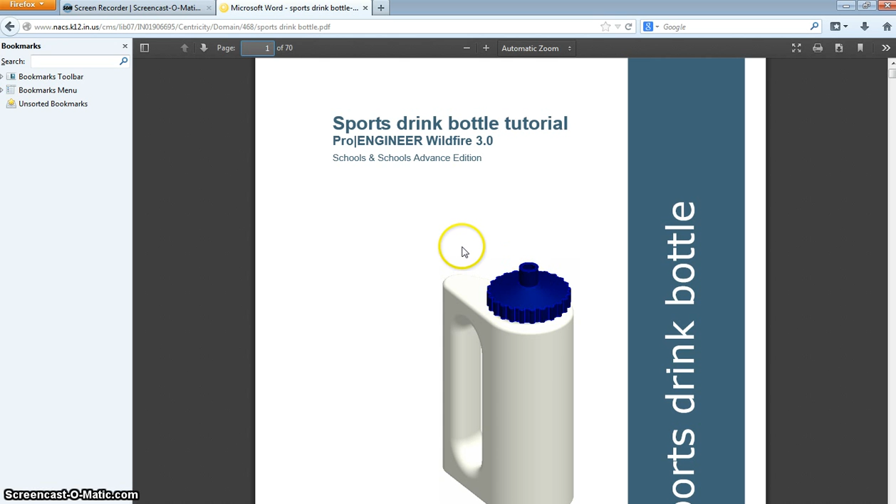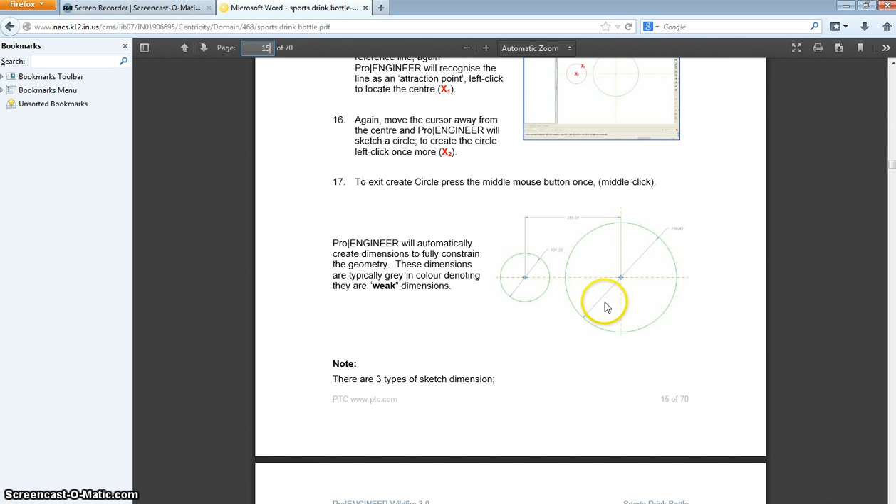Let's first skim through a few pages here. Let's jump to page 15 and skim through what they're going to have us do. We're going to draw two circles. What you want to be careful about when looking through the tutorial is that you read the paragraphs. This tutorial was actually written for a previous version of the software, so not everything in here is exactly the way Creo Parametric 2.0 is laid out.

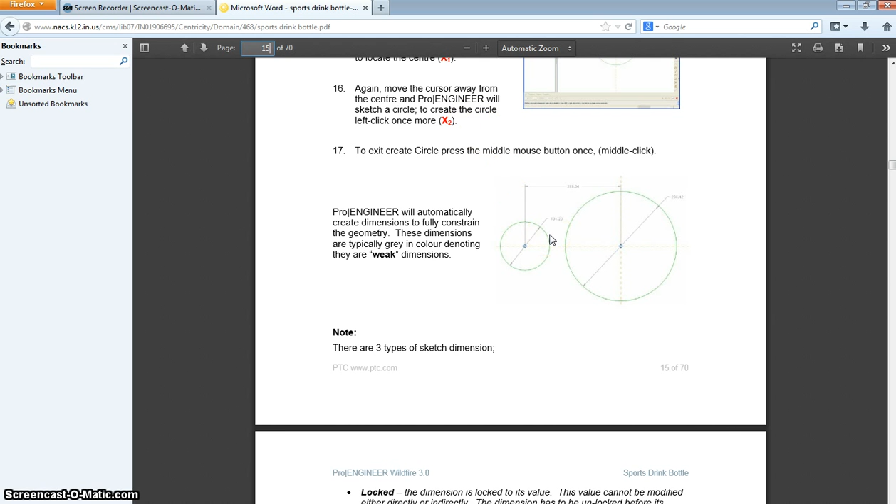But you want to look for the correct numbers or dimensions that are actually in the paragraphing. Don't go off of the dimensions or numbers that are actually in the drawing itself. These are just weak dimensions.

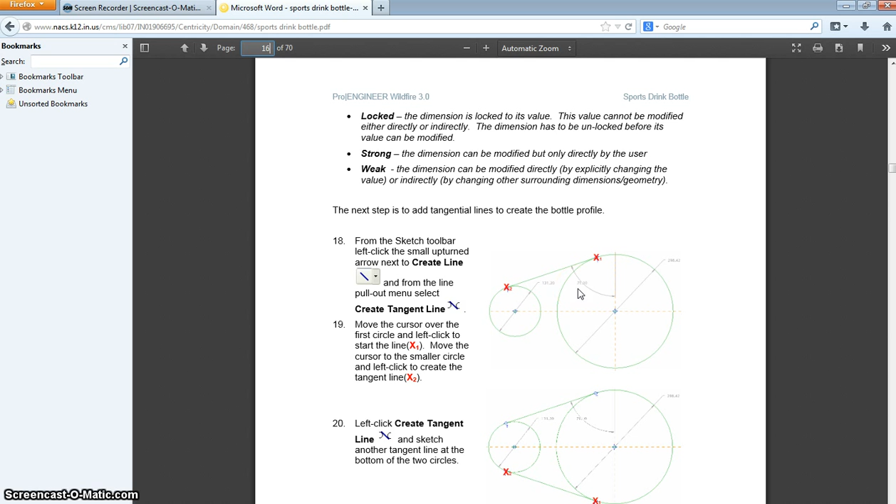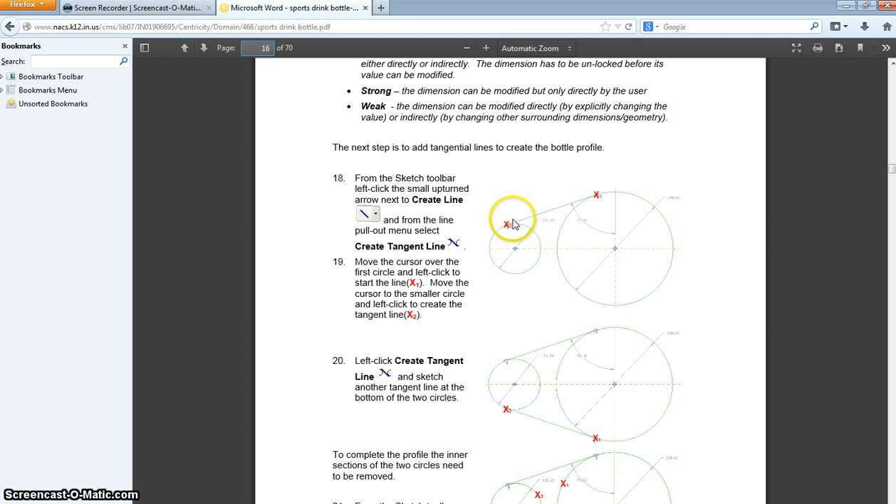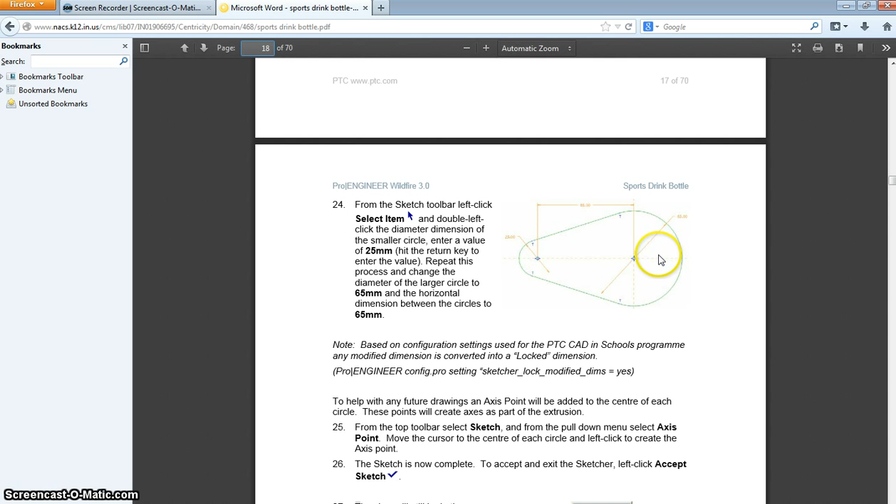So it looks like they're going to have us draw two circles, one smaller than the other, and then make what's called a tangent line, where it touches here and touches here, and there's a mathematical formula that the computer uses to find those exact tangencies. Once you've done a second tangent line down there, we'll trim it, and then dimension the drawing. It looks like the small circle is 25, the large circle is 65, and the distance between them is 65. Let's go ahead and start with that.

So we're going to go to Creo Parametric, set our working directory. I'm going to go to my H drive, my Creo folder, and I've created a bottle folder. I'm going to right click and set working directory, and make this bottle, and it is a part.

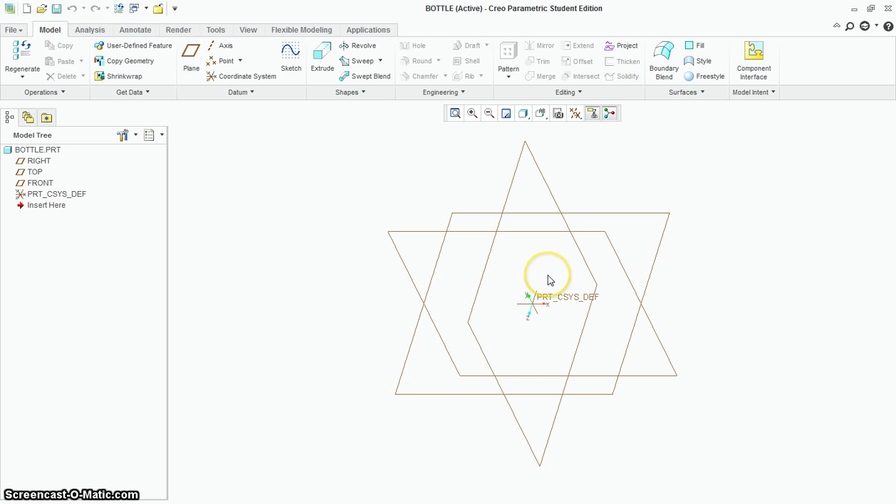Click OK. Now I'm going to draw this from the top view because that's the way we're looking at the bottle, from the top. So I'm going to click extrude, and we're going to click on the top view, click this top plane, and then I always want to click sketch view, which is going to orient the way I look at the drawing from the plane I selected.

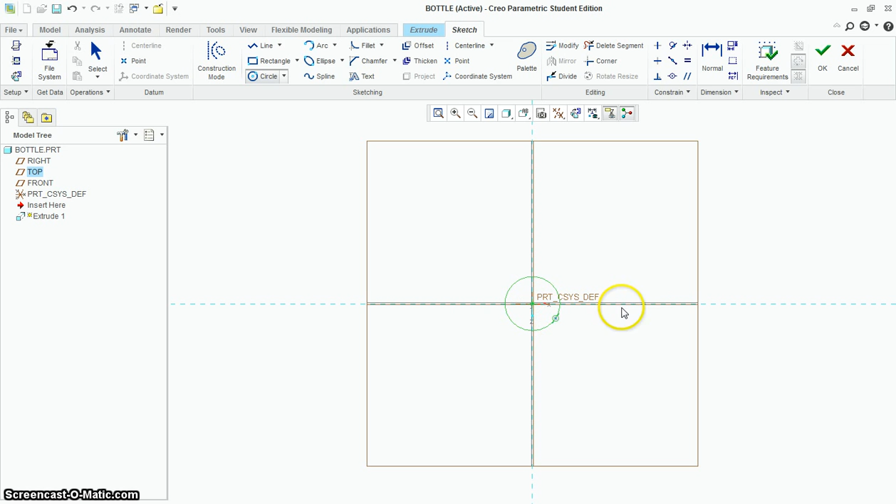So we're going to go ahead and put in those two circles. You can put the small circle on the left and the big circle on the right, and I would try to align these circles with each other horizontally. Now notice how when I make the circles similar in size, there's a little green text popping up that says R1, R1, meaning it'll lock in the radiuses to be equal from now on. Well, we don't want that to be true, so we're going to purposefully make this bigger.

So when I middle click, you can see the weak dimensions. These are always weak dimensions of how you roughly drew the circles when you got started. Now do not use a normal line chain to connect the circles, because you don't have the ability to locate the tangent point on the circle relative to the place you're going on the second circle.

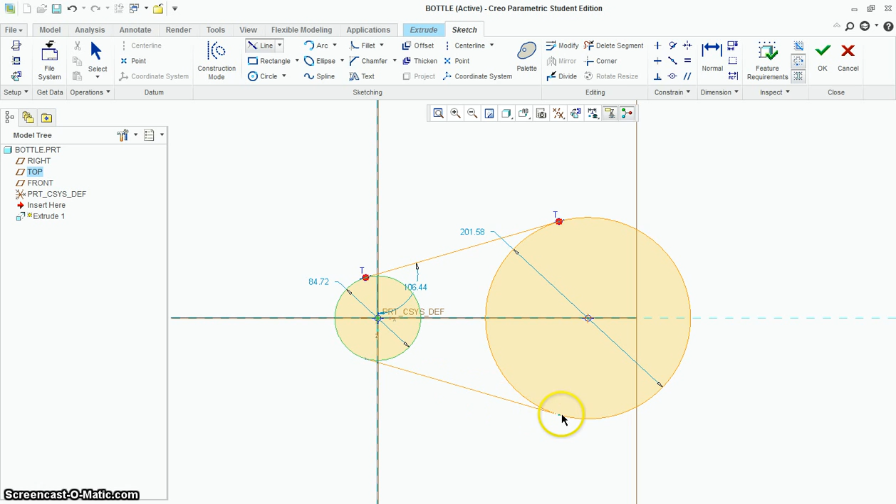So we have to select the pull down menu here under line and go to line tangent. Then the circle will highlight in green. We're going to click it, and it'll follow me around with a line. I want to come up near where the tangency is going to be, and it'll say T for tangent, T for tangent. Then we'll click on the second circle, bring it near the big circle, and click again. You got T for tangent, T for tangent.

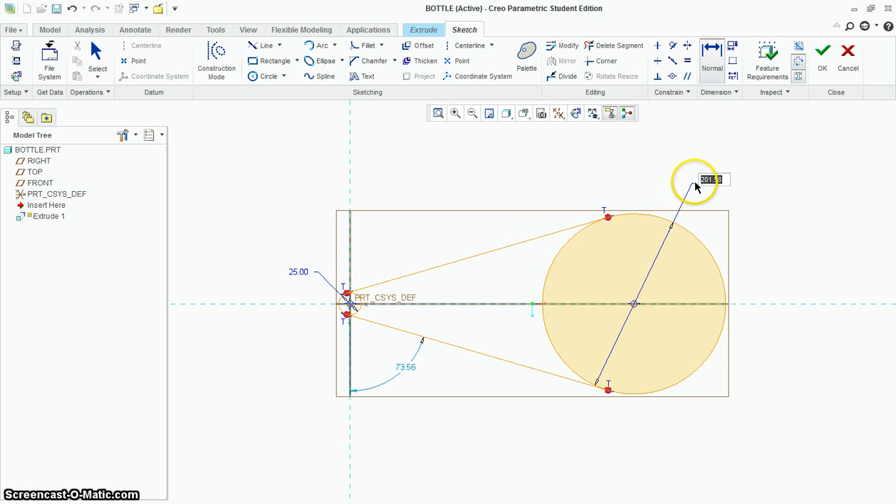Now we can go ahead and put our dimensions in. You might be able to get enough dimensions to pop up automatically, but you're probably going to have to add some of your own. So if you need to add a diameter dimension, we're going to double click the circle and middle click, and this is going to be 25. Then we'll add a dimension here, double click, middle click, and 65 is our diameter. Then we need a distance between the center points.

So on the dimension tool, we're going to click center point, and middle click, and this sets our dimension between the center points of 65. Enter. Now it's the correct size.

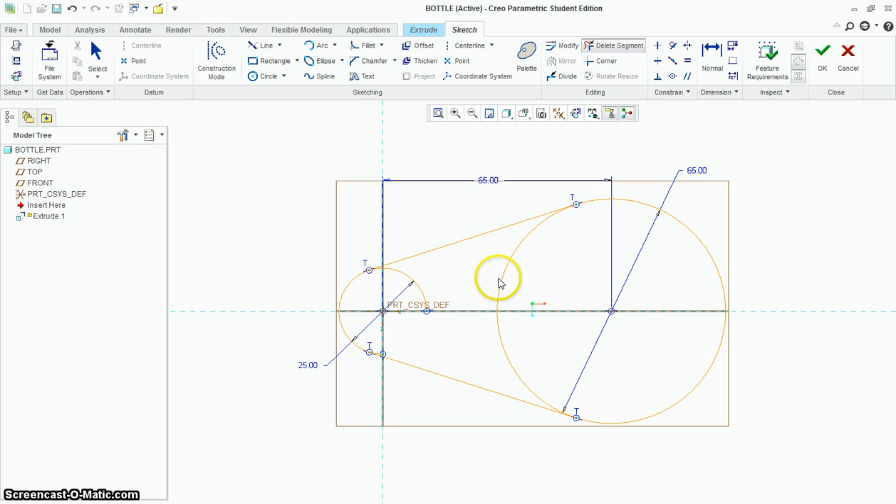So go ahead and get your delete segment tool, and trim out these internal lines that we don't need anymore. You want to be careful that you get every internal line deleted, because if I zoom in here, I've got a little piece hanging off.

If I were to green check mark, it would say section incomplete. I cannot make a 3D drawing, basically, because it doesn't know what to do with these little pieces left over. So we got to make sure that we get everything trimmed out so you have one closed object.

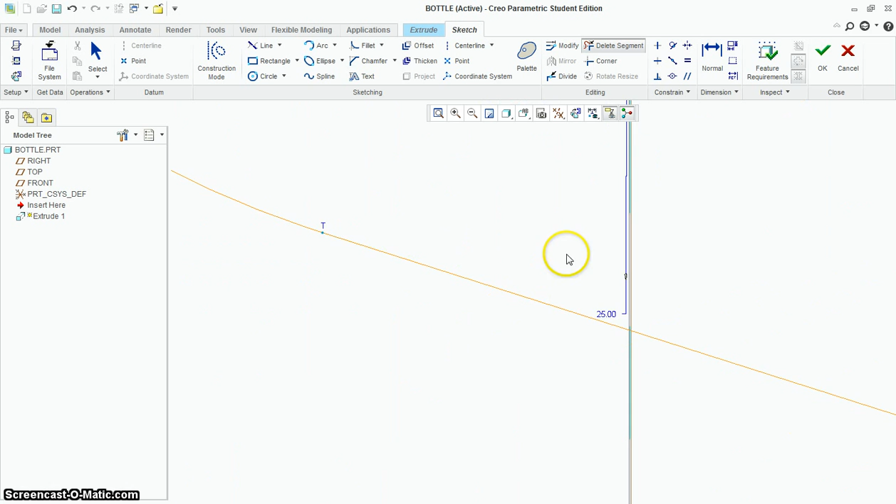And so now that we've done that, we should be good. We can green check mark, and it makes it three-dimensional, and it's starting to look more like a bottle. Now the height that it calls for is 160. We'll go ahead and type that in, and we'll accept it. And this is the first part of our bottle.

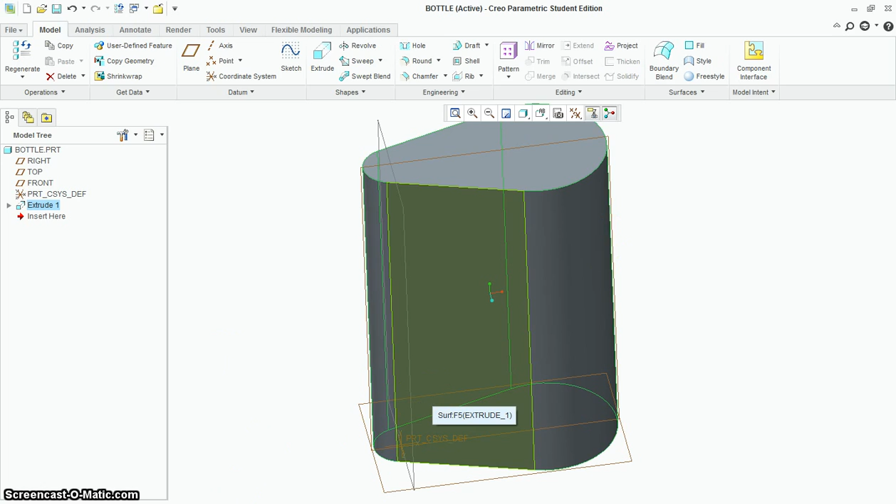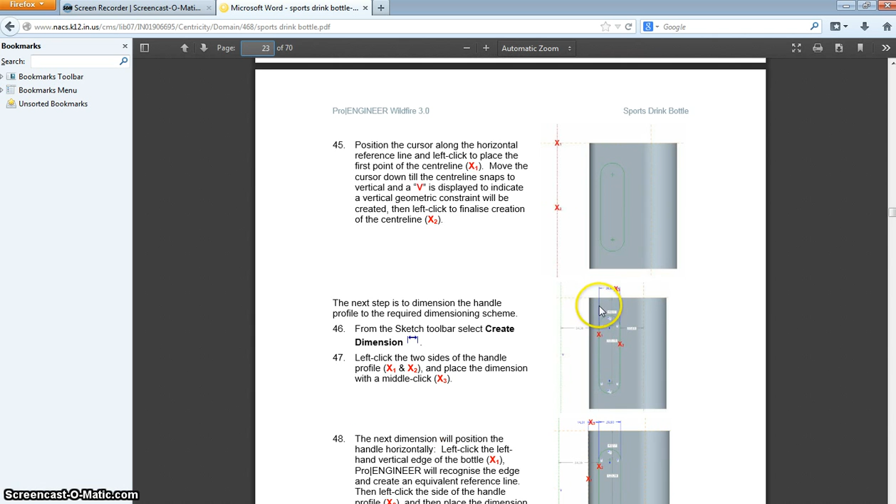And then we're going to go ahead and do one more part of this on the actual tutorial itself, and that is the handle cutout. So if we look back at our drawing here, and we skim forward, they're going to have us draw a circle, second circle, and tangent lines, or you can actually use a normal line in this case too. And then we're going to dimension it, and that's what's going to put it in the proper place.

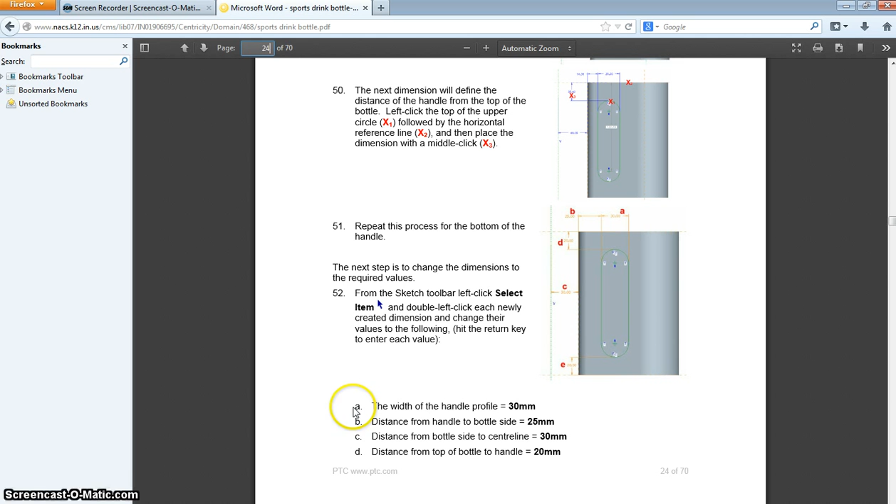So if you skim on up to page 24 in your PDF tutorial here, you can see that here's how it's laid out. Let me zoom in a little bit so you can see better. A, as labeled on the drawing, is between the side and the side of the handle cutout, and they label A down here at the bottom. The width of the handle profile is 30.

So the distance between here is 30. Then they say B is the distance from the handle to the bottle side, so from here to there. And then C is 30, from there to a center line. Notice the center line's kind of out here in the middle of space. And then D is the distance from bottle top to handle top. So D is 20 and E is 20.

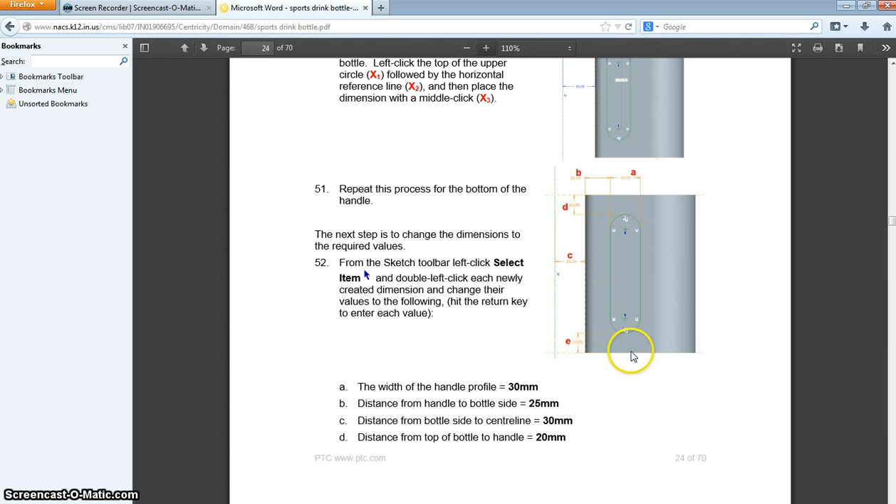So let's go ahead and do that. So we're going to go back to Creo. And this is actually a revolve, so you do need to read your instructions to find this. We're not doing an extrude here. We're doing a revolve, which is going to give us a nice ergonomic fit to our hand on the actual cutout.

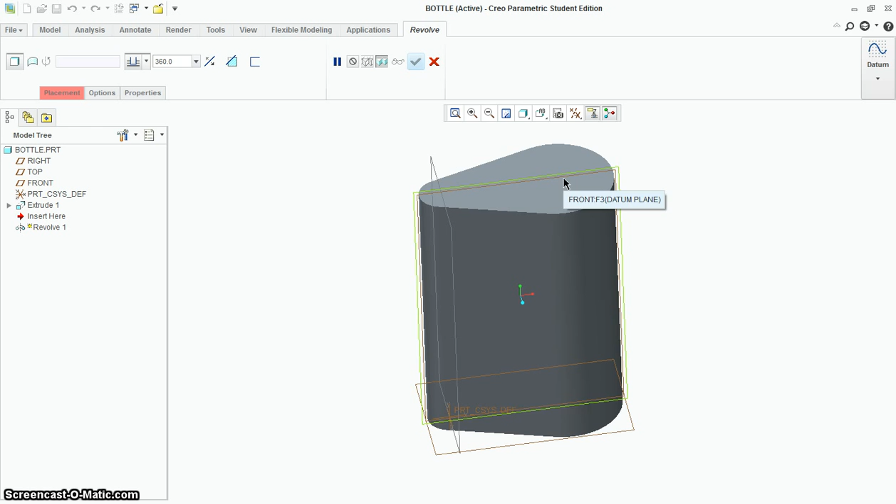So we're going to go revolve, and you have to select the plane that's cutting through the bottle. It may not be called front for you, but whatever that plane is called, that's the one you want to click on. And then we're going to go to sketch view, like always. Get used to going to sketch view.

So we're going to go ahead and drop our center line in because we're doing a revolve, and I'm just going to place it out here. I don't know exactly where that's at, but that's okay. We'll dimension it correctly later. And then go ahead and place a circle right here, just guess. That's what's kind of odd about this type of drawing program, is we're doing a lot of guessing initially. And go ahead and make these two circles the same size.

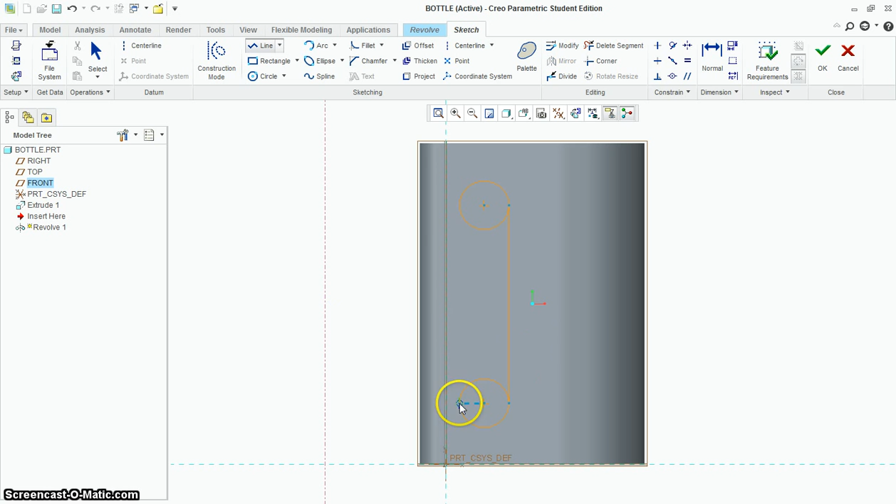So R1, R1. And then they say you can use a tangent line. You can also use a line chain if you want, because you're going from the quadrant point, which is the east point. Quadrant points are north, south, east, west. So if you're going from east to east, you can actually use a normal line chain. Middle click to end that line. And then we're going to go from the left side to the left side again, and middle click. So we've got this basic elongated handle cutout there.

So let's go ahead and delete the internal line here. And then we just have to dimension everything correctly. So if we go to our dimensions, it's giving us radius here. Now most of these dimensions are not usable. I would just follow what the book says. And it says from the right side of the handle cutout to the left side, middle click, is going to be 30. So let's just type that in.

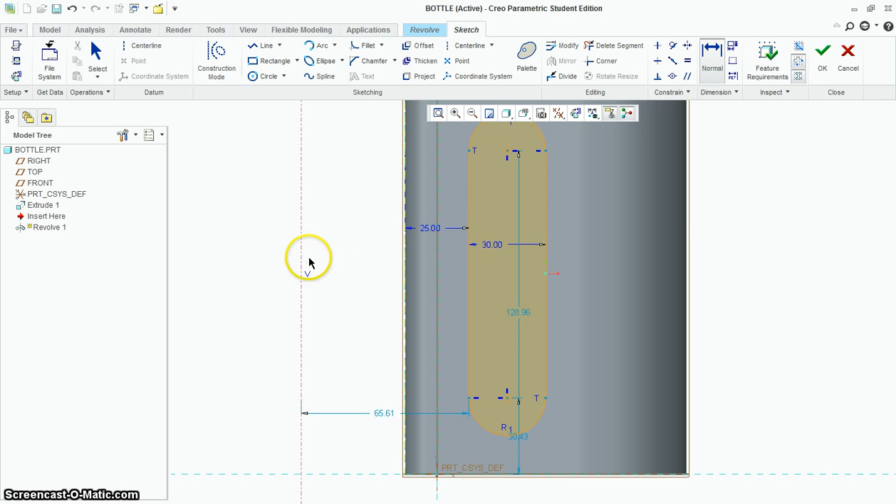Then the left side of the handle cutout to the edge of the bottle is going to be 25. And then from the side of the bottle to the center line is 30. And then this is a common mistake: the top of the handle cutout to the top of the bottle, this is going to be 20.

But what a lot of kids accidentally do is they go from the center point to the top of the bottle and make that 20, but it's actually the top of the arc there. And then bottom of handle cutout to bottom of bottle, middle click, 20 again. So all dimensions are correct, and we're going to go ahead and accept that.

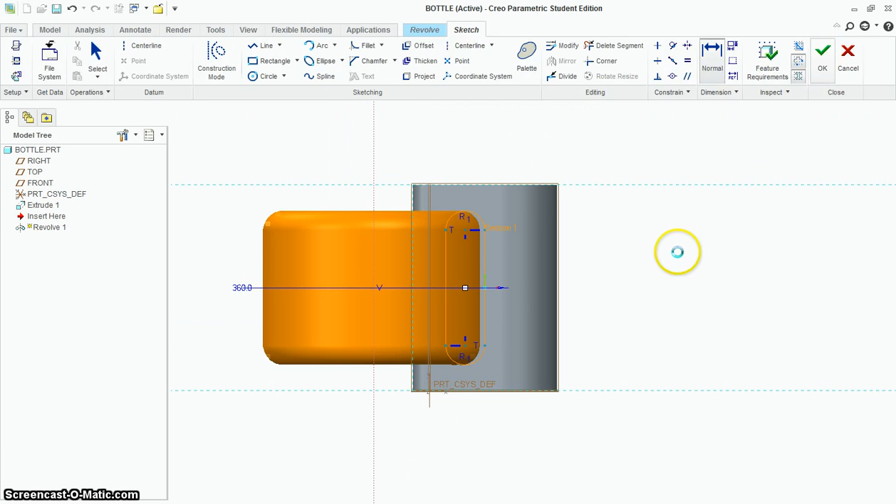And you can see it's going to spin around that closed shape around that center line that I placed out here. Now, if you just accept it like this, it's going to add solid material. What we actually want to do is remove material, and you'll see it's going to cut that nice handle cutout in there, and your hand's actually going to wrap inside of there, and it'll be more comfortable because it's a revolve and not an extrude. So we'll go ahead and accept that.

Okay, so this will end the first tutorial on the bottle. We'll go ahead and break this bottle up into two drawings probably, or two videos that is.